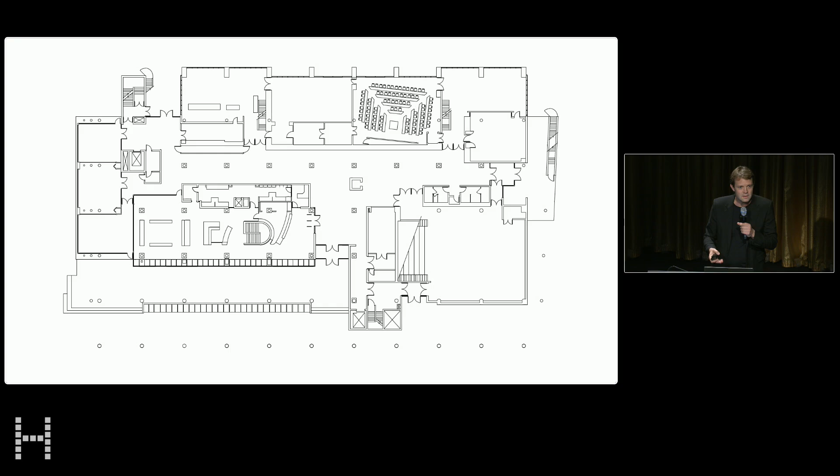And I thought, is this a building? Is this a climate? Is this a landscape? Is it maybe a landscape that mistakenly thinks it's a building? And so, as we always do, we started reading the existing situation. And we thought maybe those columns are part of a kind of hidden forest that holds the building. And maybe the walls are contour lines. Maybe someday a river was passing through. And maybe the perpendicular walls are obstacles that allow the building to have doors.

And so we were looking at this space, this hall, and how do you make an exhibition in a hall? It's quite an interesting question. And we noticed that there was a kind of a meander of that river, and so a kind of a center. And from that reading, we thought maybe we can use that center to place our 3 large-scale models that you have seen when you walked in, find a space to project photographs that our photographer Michiel De Cleene has been taking for the last 10 years, use the other walls for the necessary information, and then make a connection from these projects to the research by this 70 feet long wall where we project the surface temperature, and then again using the columns to frame the student work on Paris and on New York.

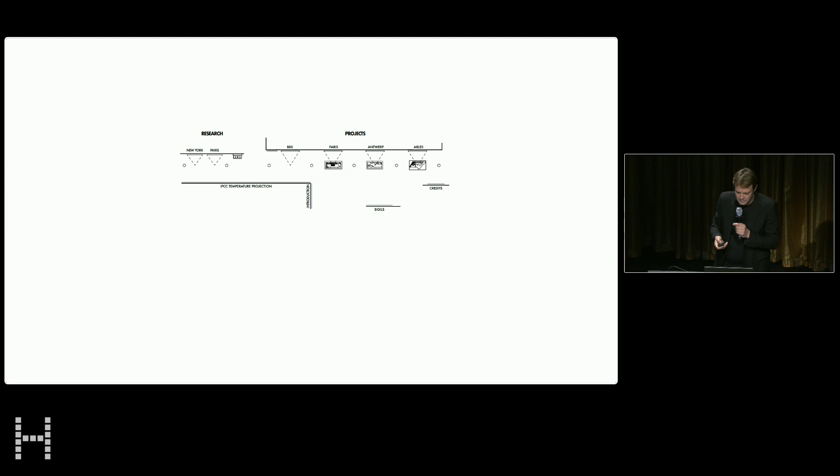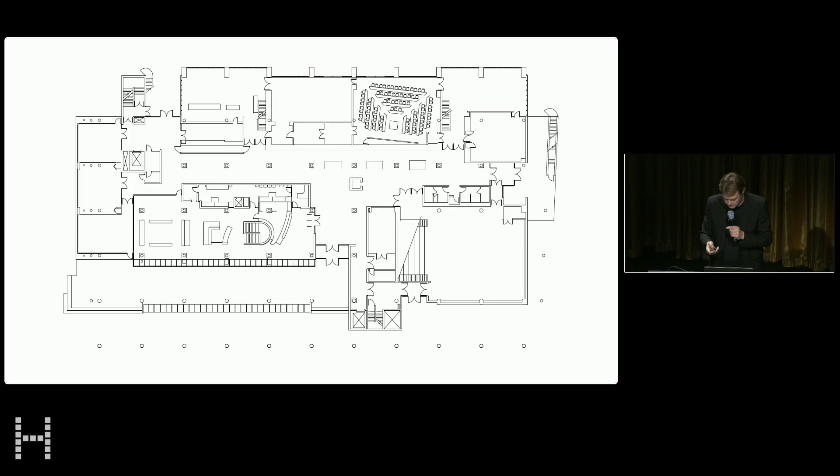And so in a sense, the whole build-up of the exhibition for us was yet another landscape, yet another climate that we wanted to insert in its context, in this case, a context of a building. This to show you how, for us, everything is landscape. And it was Maja Hoffmann that once told me, "Pour toi, tout est paysage." And so I'd like to walk you through both the research and the projects that we show here, and to show you how indeed everything is landscape.

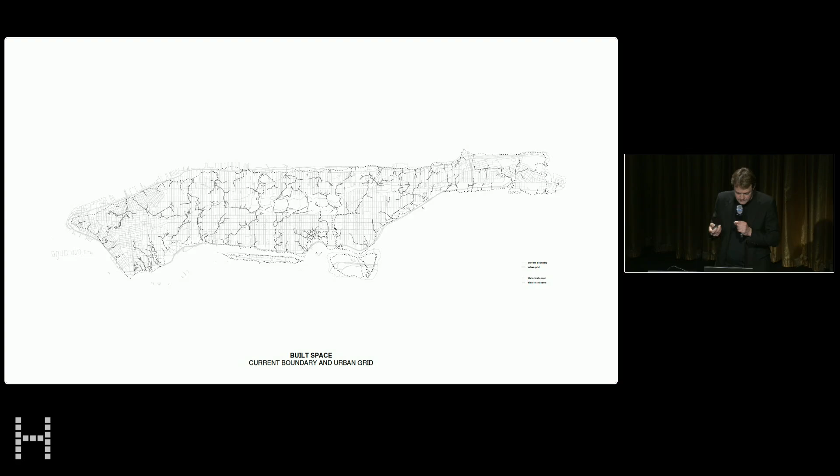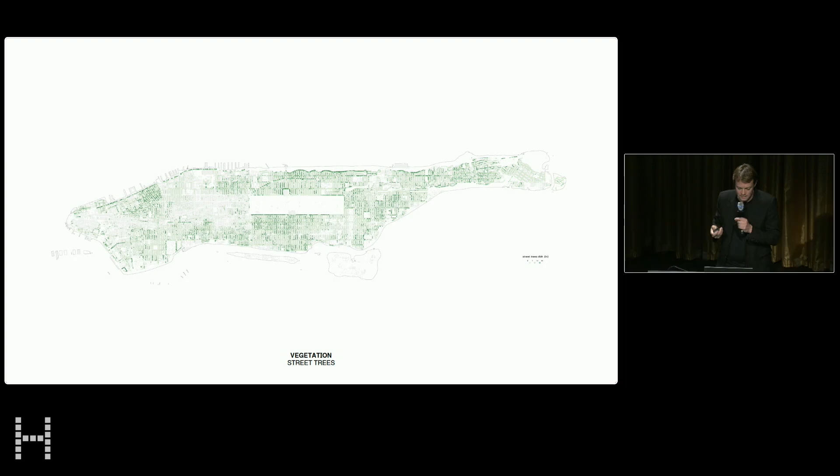The first case study we did was on New York City, and more precisely on Manhattan. And I had asked the students to work as a group, as a real studio, and to do a reading of the existing situation, going through the former tributaries, looking at flood risks today, at stormwater flood to understand that those are directly linked to the tributaries, looking at green space, but also at street trees, and even at possible rooftops. And so really mapping and mapping and mapping at the scale of the city, at the urban scale, to come up with a new type of cartography.

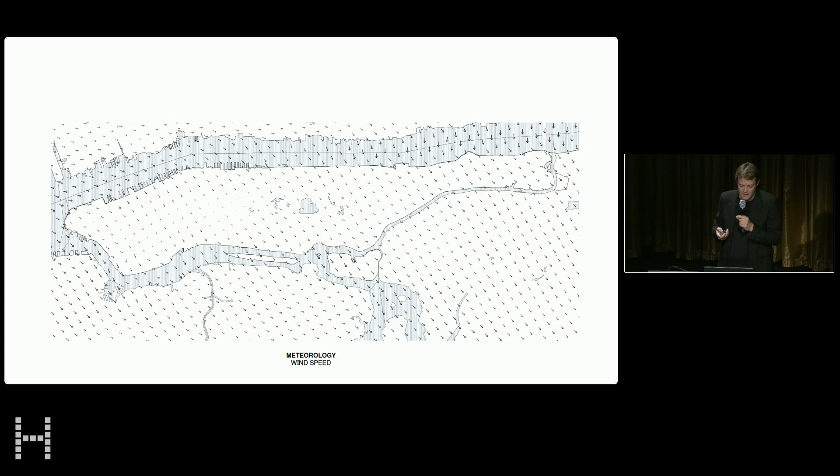And in the Dan Kiley lecture I gave last year, I showed you the von Humboldt design. So we're looking for a new way of showing and revealing this information that we extract from those readings. And those readings are physical, but also meteorological. So also the wind, also the surface temperature, also the quality of the air. And so this led us to these beautiful drawings that show everything except for the building. We make abstraction of the building to show how the built reality produces a multitude of microclimates. And for each of these microclimates, we can look at a similar situation in nature to learn from that situation and bring the logics of nature into the artificial second nature.

And that's what we did with the students who chose their own site. And for me, it's important that the students choose a site based on the problems they reveal. And I'll show you 3 of those projects among the 12 beautiful projects that had been made as an illustration of how I try to think with the students in a different way.

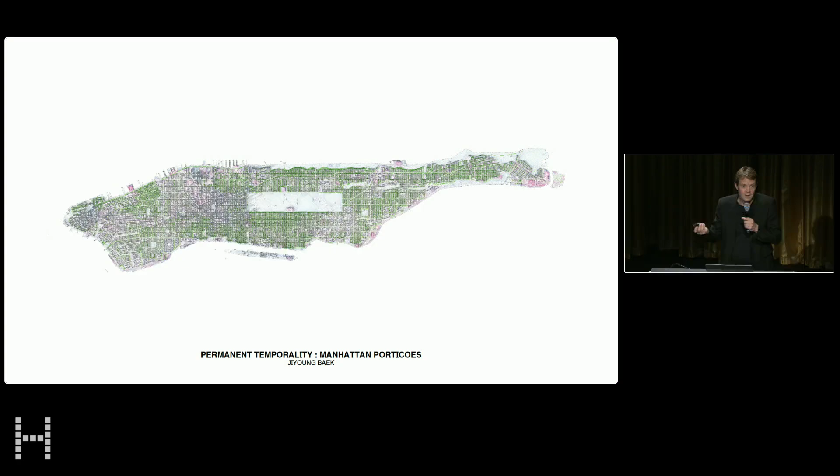So, for example, here, Jiyoung Baek looked at porticos, well, actually scaffolding, and she noticed that the temporary scaffolding of New York today is 1/3 of Central Park. Why is that? Well, she discovered that today it's cheaper to pay the penalties to keep the scaffolding in place because you need to verify the quality of your facade every 10 years. It's cheaper to pay the penalty than to dismount and remount.

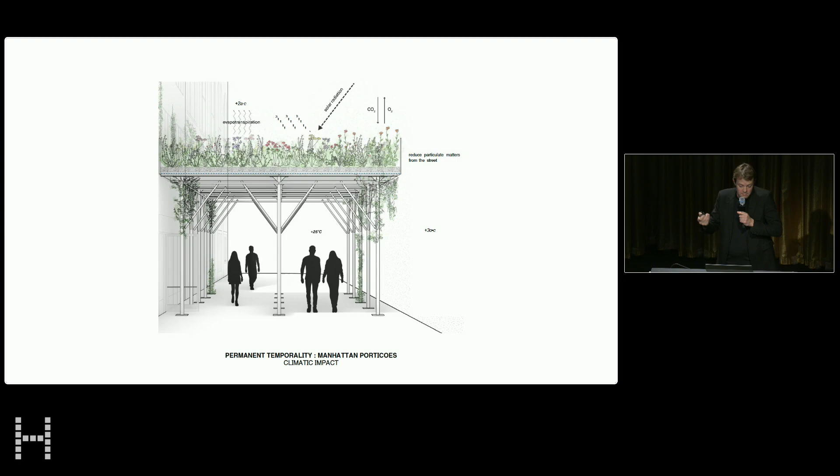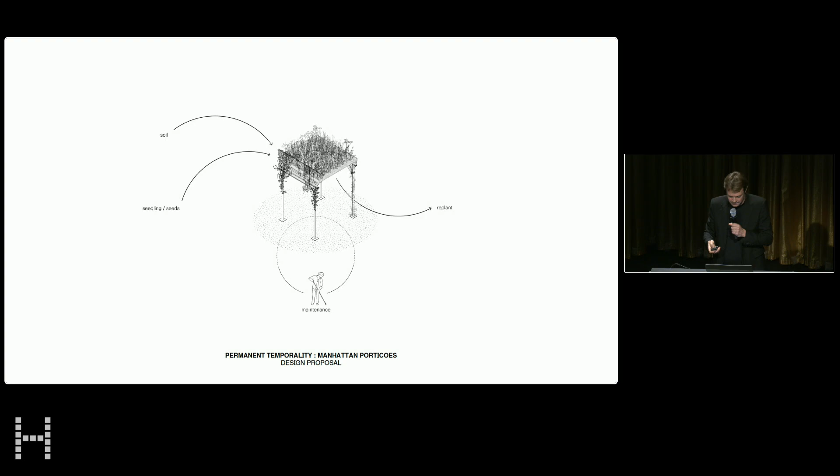And so she thought, and I thought it was a beautiful idea, to give a tax reduction or a penalty reduction if the scaffolding becomes a green roof, of course, creating a better outdoor comfort and bringing more biodiversity into the city. 1/3 of Central Park for free. And so I really encourage them to hack into the system and find ways of greening the city without cost. And so she did that in a beautiful way.

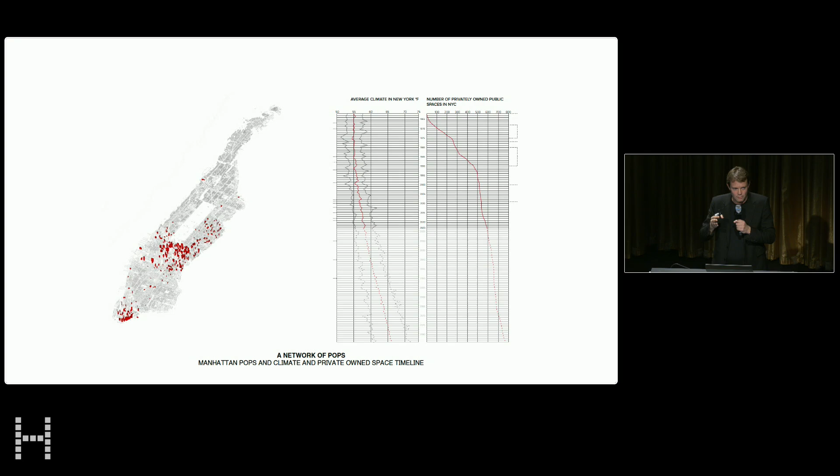And in that law, and I think it's 76, if I remember well, it was written you had to plant 4 trees. And so Austin said 4, why 4? So he thought, and thanks to Transsolar, with who we've been working on all these studios, he thought, let's measure UTCI instead of number of trees. UTCI is the Universal Thermal Climate Index.

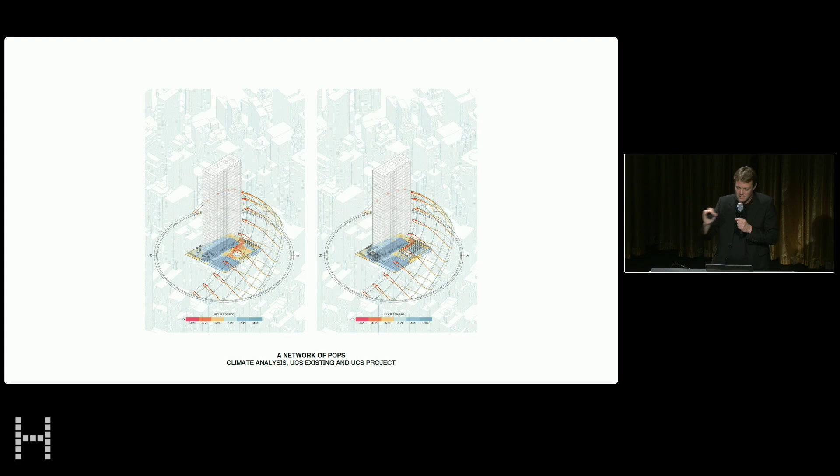So he thought by simply adding to that law that the UTCI should be lowered by X degrees, you could suddenly create a network of POPs. And here he showed that for a part in Midtown, and all the blue trees are the new trees that would be the result of this law. So again, hacking into the system to produce better public space.

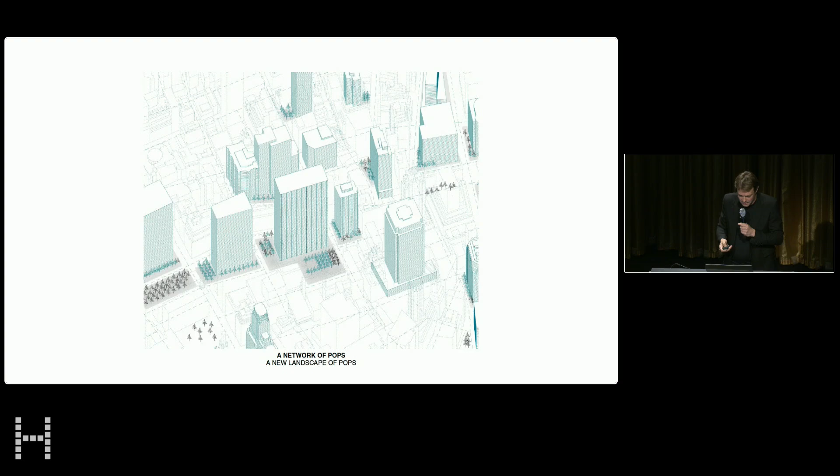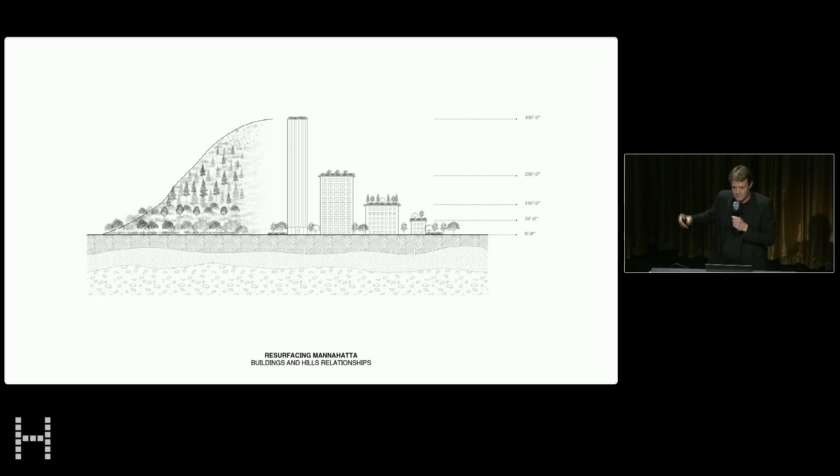And the third project by Parama Suteja was, he called it resurfacing Mannahatta, and he found out that Manhattan comes from Mannahatta, which means island of many hills. And so he looked at building heights, and he thought, well, actually, we still have the hills. I mean, Manhattan has been flattened. We still have the hills, but they are on buildings. And so he thought, can we make a new hybrid landscape of green roofs, and based on typology and weight, creating this kind of new green mountains on the hill of Manhattan.

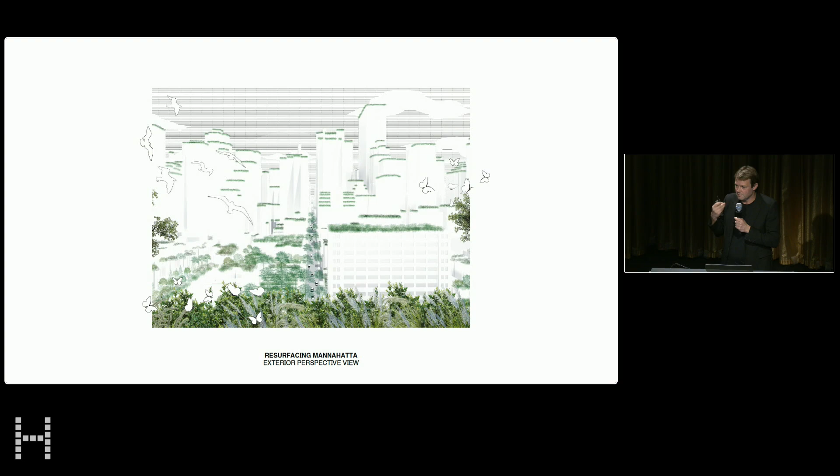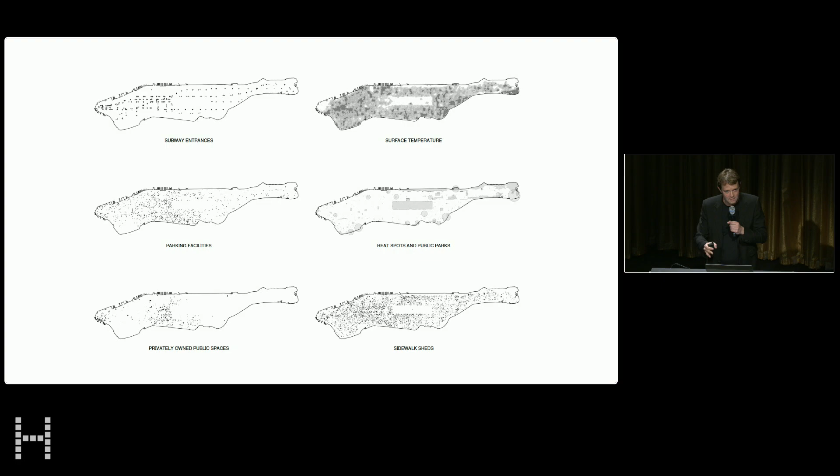So 3 examples of how, through the reading, through a new way of looking at the built space, a new way of looking at reality as a possibility for nature, for a new type of nature, how these students perfectly hacked into the system. And along the way, we make beautiful drawings, not because they're beautiful, but they're beautiful because of their clarity. I believe in clarity of a drawing. A clear drawing is always beautiful.

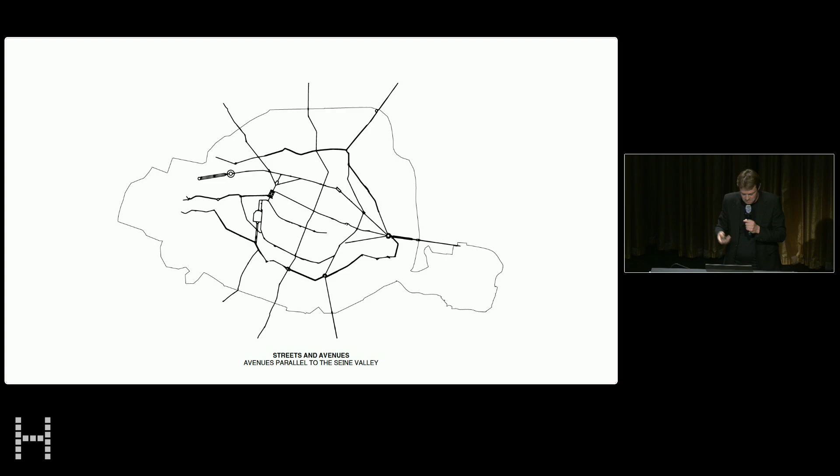The next case study we did in Paris. I'll run you through it. So again, the reading, the topography, we discovered that Haussmann's boulevards are mainly parallel to the contour lines of the valley of the Seine, except for a couple that are perpendicular. We discovered that the runoff from Montmartre, which you see on the top here, that creates flooding along the Seine, that water could be perfectly recuperated by these parallel avenues. And so suddenly you have a system to reduce flood risk at the scale of the territory.

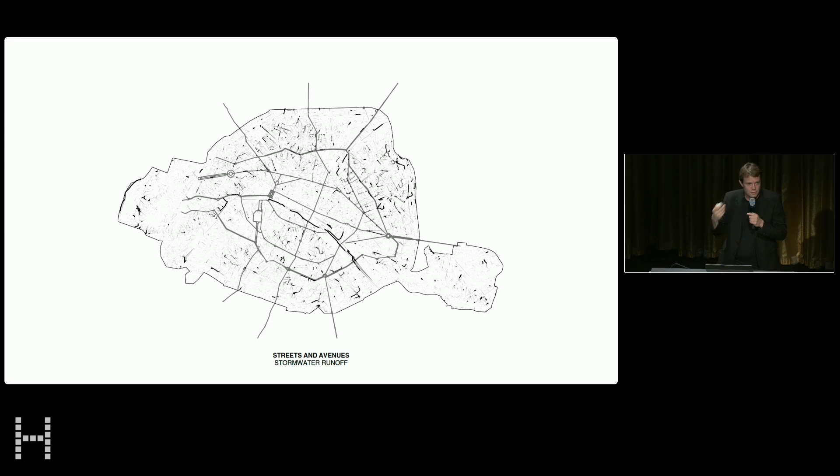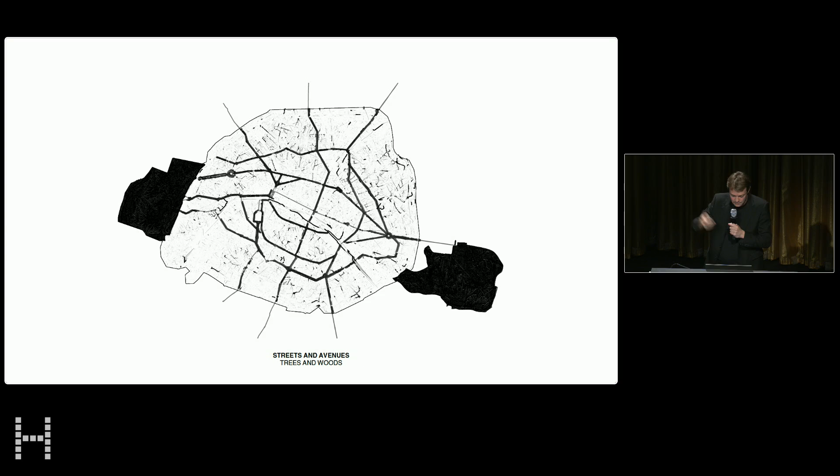We showed it to the city representatives that hadn't seen that at that scale. And so suddenly you could have these boulevards that are cooled down by the runoff, by the evapotranspiration of the trees that would create corridors from the Bois de Boulogne to the Bois de Vincennes. We looked at all the open spaces, cemeteries, squares, plaza, everything not built. We looked at parking lots. We looked at all the public buildings that also could become part of a way to battle heat.

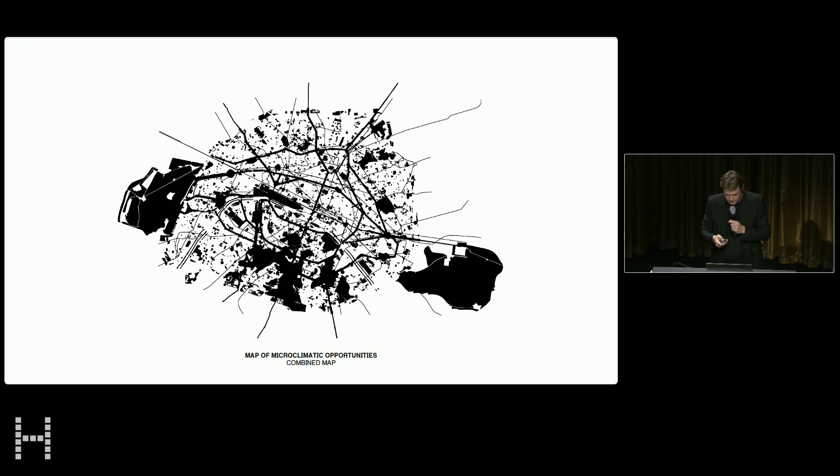We looked at the underground, from the car parks to the metro lines to the quarries, and then we made this map, which I really like, the map of possibilities. This is the map of all the combined elements that we think we can hack into, and I'll show you what the students did with a couple of examples. Again, they chose their own sites, but here, since Paris is made up by typologies, we looked at changing those typologies, and we looked at a way of organizing the kind of dramatic future that lies in front of us, and you can see it on the wall.

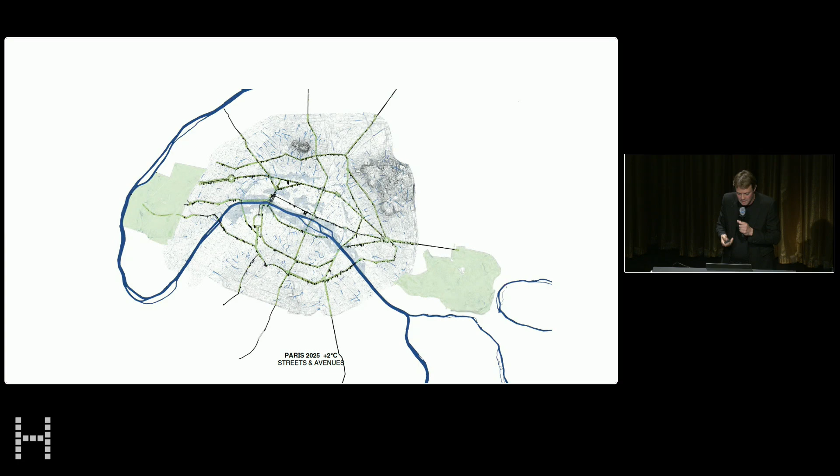We looked at what to do at 2 degrees more, 2025, what to do at 3 degrees more, 2050, what to do at 4 degrees more, 2075, and what to do at 5 degrees more, 2100. And so in a very pragmatic way, we come up with the proposals. Here, for example, 2 degrees more, I mean, we're at 1.3 right now. We should use those boulevards made by Haussmann, and this first group showed it.

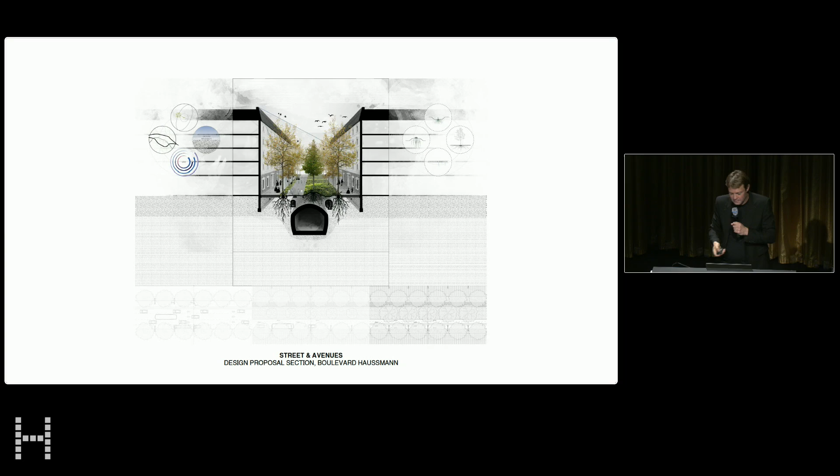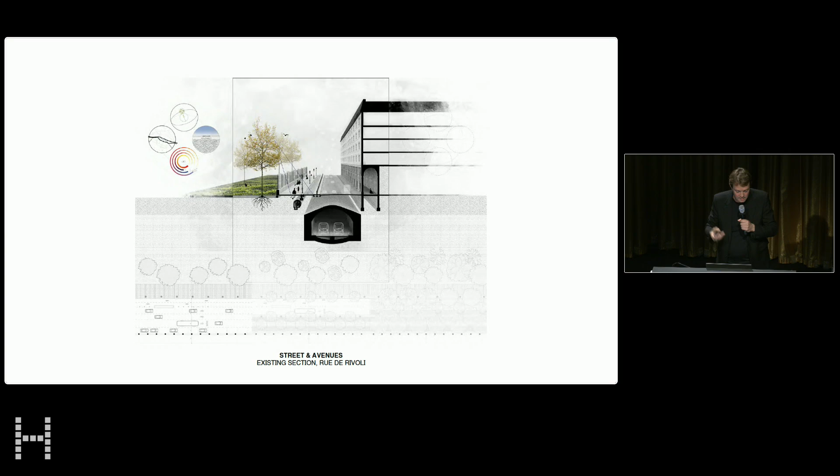By taking out space for traffic, we can make bioswales. We can store all that rainwater running off from the hill of Montmartre, using it to feed those trees to create evapotranspiration and making a microclimate. The city was very positive towards that, because that's exactly what Hidalgo has been doing, reducing space for cars and creating more space for pedestrians, bicycles, but also vegetation. So 2 examples of that.

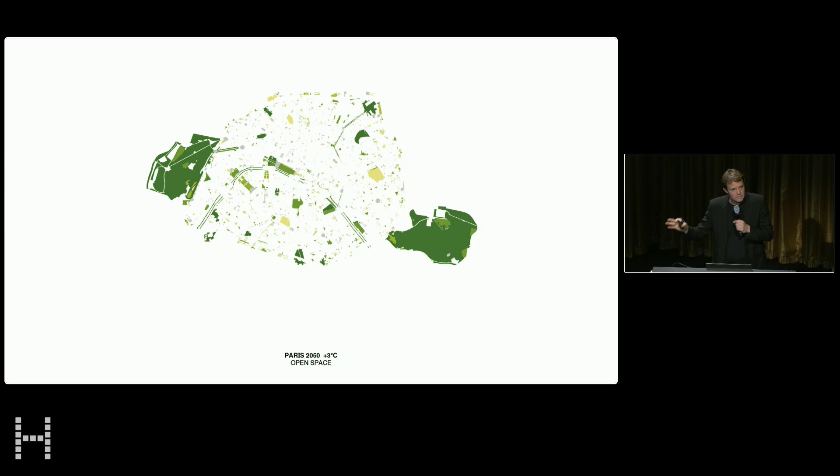If we go to 3 degrees, the group working on 3 degrees thought about what to do with open spaces, both gardens, roundabouts, or plazas. And for example, Roxanne Garner looked at l'Esplanade des Invalides, one of those sacred spaces for the French. And she found out that the lawns are not possible anymore.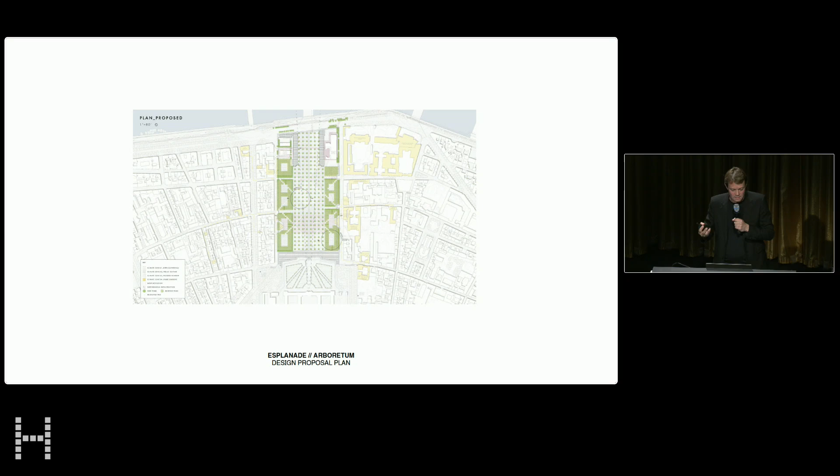When it's too hot, you're not allowed to water them, and so they die out. So she thought, why not use the grid of the trees that border those lawns, create an arboretum with trees that are climatically resistant to the drought, and to suddenly frame Les Invalides, this famous view, within a park-like structure that can be used instead of a lawn that cannot be maintained.

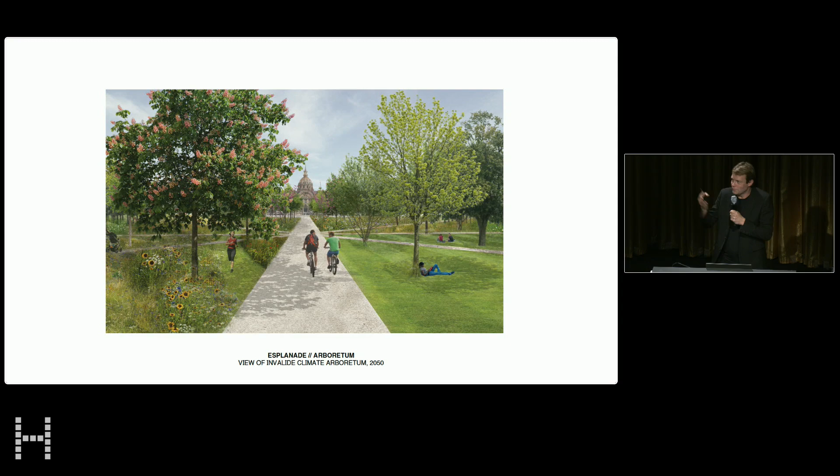We had an interview with Le Parisien, and this became the cover of the journal. And so, in a very interesting way, with the students, we're allowed to try these things out. Like, I could not do this while working on Notre Dame, but because it's student work, we can really test new ideas.

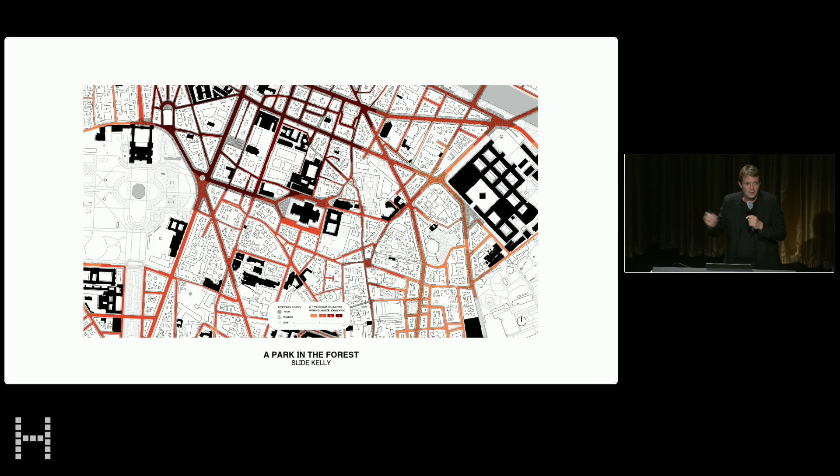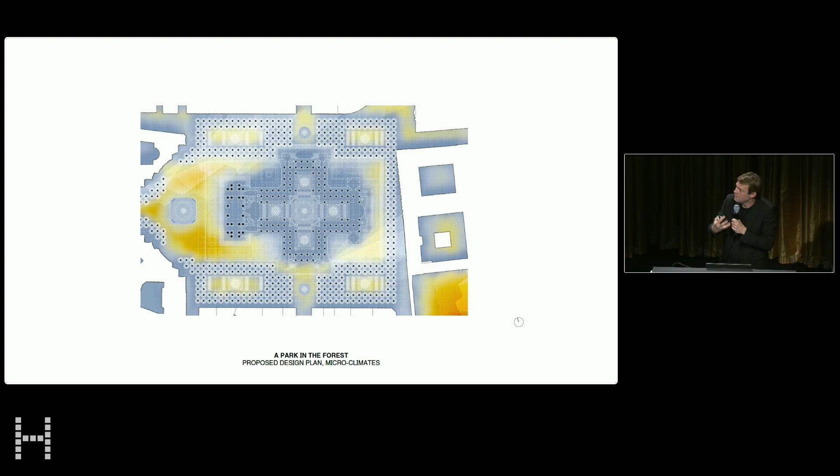Then we go to 4 degrees, and it's also based on what the city of Paris is already thinking of doing, opening up schools to deliver water to neighborhoods that have problems with the heat islands. And so here, 3 students looked at different types of public buildings. And I will show you the work of Slide Kelly for the Pantheon, another of those sacred monuments, surrounded by hardscape, surrounded by facades, so really heating up in summer. And he looked at the plan of the Pantheon as if it was indeed a forest in stone, and continued that with a forest of trees surrounding the beautiful footprint of the Pantheon.

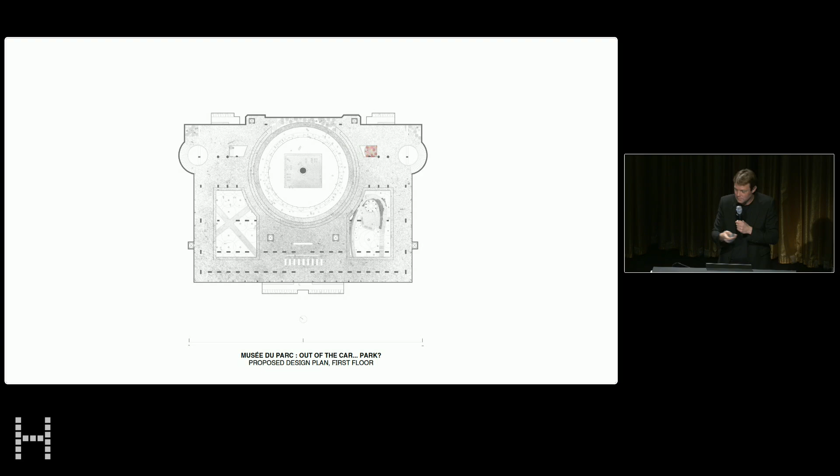And then at 5 degrees, the group really took it very seriously and thought, okay, if it's 5 degrees, I mean, we're looking at 50 degrees Celsius in the summer, we need to go create refuge underground, a bit what Houston is already doing today. And Crane Saris looked at parking lots, and he thought, actually, parking lots are a great structure, because, of course, you create shade. And he looked at another one of those great places, Place Vendôme.

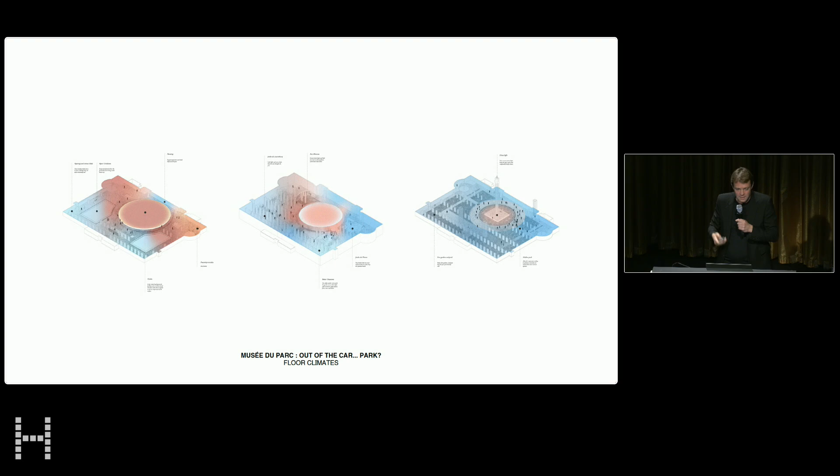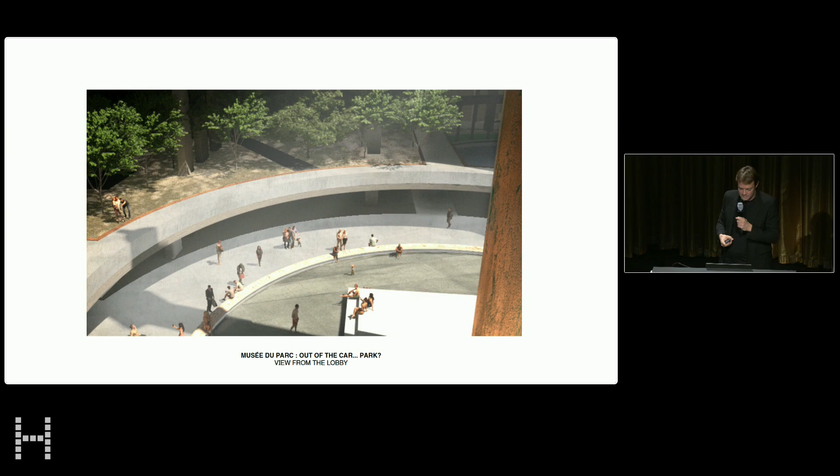And he thought, if I make a big opening around the obelisk, if I take out a couple of floors, I can bring back the idea of flâner, of walking around on the boulevards in Paris and in the parks of Paris, but in a better temperature, in a more shaded place than in the scorching sun outside. And so here he made these beautiful images of the Place Vendôme become this kind of temporary and contemporary grotto.

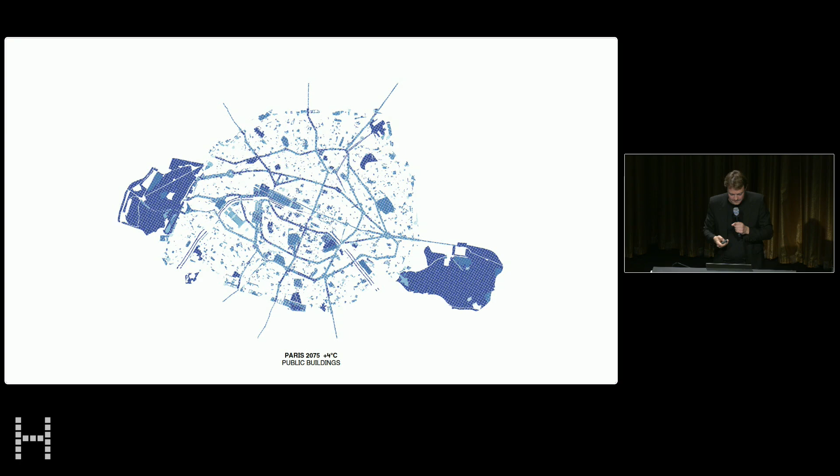And here we looked at the possibilities of 2 degrees with the streets and the avenues, 3 degrees the open spaces, 4 degrees the public buildings, and 5 degrees the underground, to again make a kind of blue map of possible interventions to make the city ready for the challenges of climate change. That research is projected on a white wall right next to the black wall where we show our projects.

And just to give you an idea of what we have been doing these last 15 years, I asked Michiel de Kleene, who has been following our works for the last 10 years, and the idea is that he doesn't take the right picture at the opening, as you would maybe do for a building, but he goes back to the site. So he takes pictures every time he's there, in summer, in winter. And so he made a selection of 106 pictures of 50 projects organized by month. So you go from January to February, from winter to spring, to summer, and to autumn. And so these play in a loop as a kind of showing the possibilities of change.

Next to that, we show 3 large-scale models. I'll walk you through them because we don't try to explain the whole project, but we try to explain the climatic approach. And so each of these 3 projects responds to a different challenge of climate change. In Notre Dame, specifically the heat islands, you may remember from the past, if you would wait for 3 hours to go into the cathedral, you'd have a headache. Well, they expect 15 million visitors after the opening, end of this year. And of course, the climate is not getting any colder.

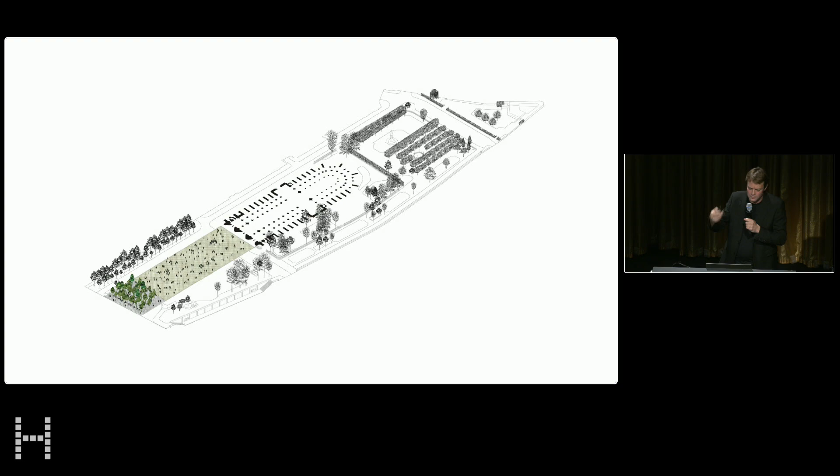And so here, from a precise reading of the site, even redrawing the trees at the same height, at the same width that they have, we proposed a scheme where every one of those typologies, from the parvis to the placette, to the square, the gardens, to the street with its alignments, and the embankment along the Seine, we rethink each of these very strong typologies in a climatic way. So we try to bring the past with us and make it ready for the future.

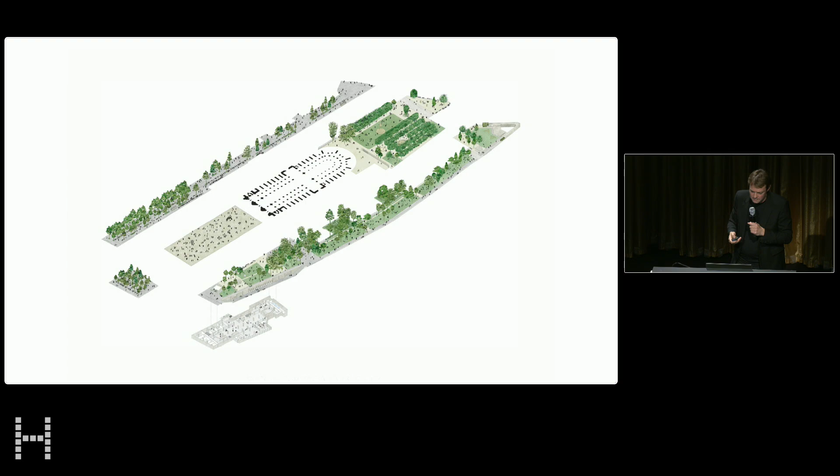And this idea of working in these typologies allowed us to have each of these elements progress within the theme of climate, if you understand what I mean. So we could think, okay, we can plant some more trees on the north side of a cathedral because that's in the continuity of the trees that are there.

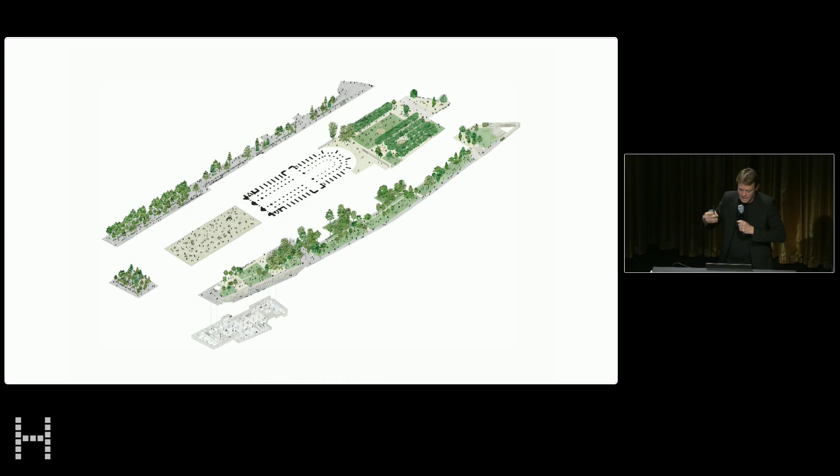We can rethink the plaza as a continuation of the inside of the cathedral. We can think the embankment as a continuation of the trees along the Seine. So suddenly we would concentrate on the typology and make it part of a whole. I'll show you a couple of pictures.

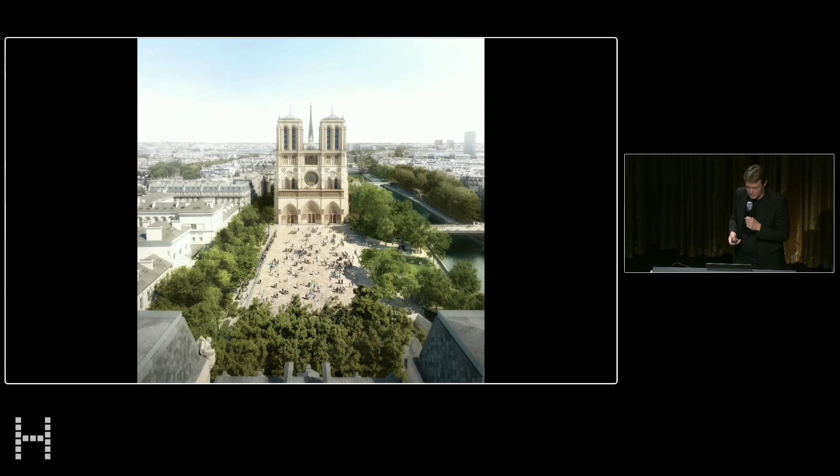So the parvis becomes a clearing. It's not just a plaza, it's a clearing surrounded by trees that provide shade. And so these 15 million people, before going inside, can profit from this shade and the evapotranspiration of the trees.

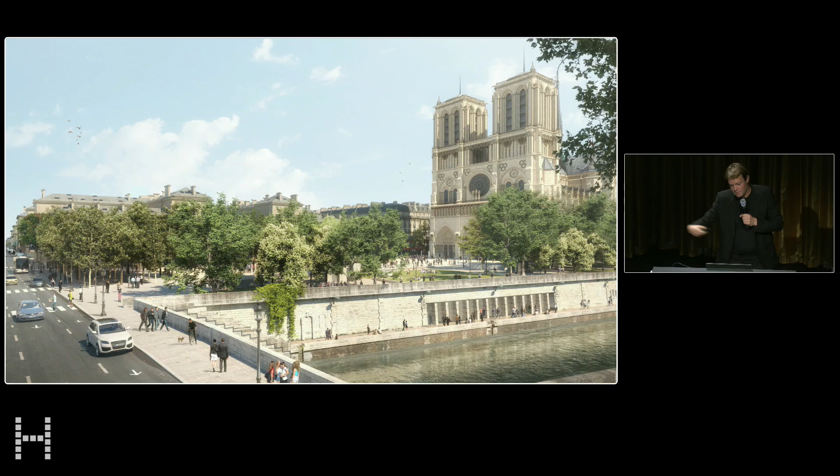Along the Seine, we planted 150 more trees to create shade again, to also help cool down the wind that comes from the Seine and that goes all the way to the plaza, but also at the tip where you have this beautiful memorial by Pingusson. We take out the parking places that were there. We plant new trees. We make the lawns bigger, and we invite people to really do the walk around the cathedral, not only be in front,

but walk around. And then on the plaza itself, and that's shown on the model as well, we invented this idea of adding a thin layer of water, and my daughter here will show you, that will run down to the cathedral and will create evaporative cooling. So it will not cool down the stones, but it will cool down the air through evaporation, about 5 to 10 degrees, depending on the wind.

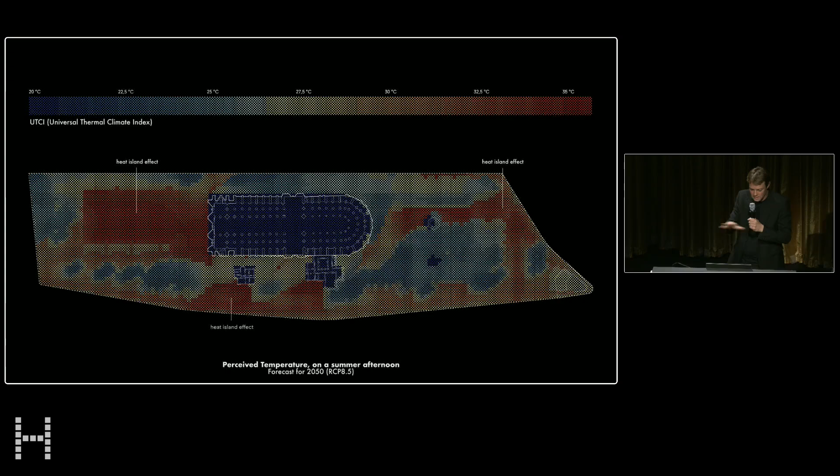And so on the model, what we've tried to do is to show how the UTCI, the perceived temperature today, will become worse around 2050. As you see, it's becoming dark red, so you create all these heat islands, especially in front of the cathedral, where we're obliged to keep an open space, but also in the back. And here you see that through the trees, through the water layer, through the wind from the Seine that passes through, we can work on the perceived temperature.

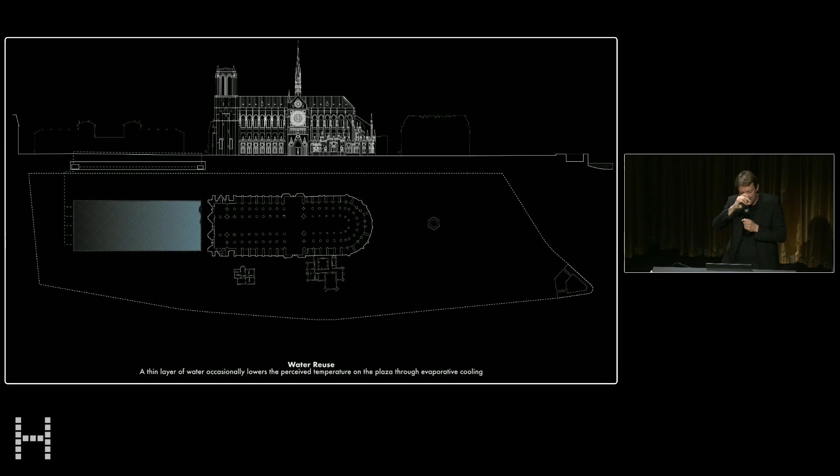More about this water layer, the idea is to store the rainwater in the former parking lot that will become a visitor center, and on hot days, we can pump the water and create that layer, 5 millimeters really, to create that evaporative cooling.

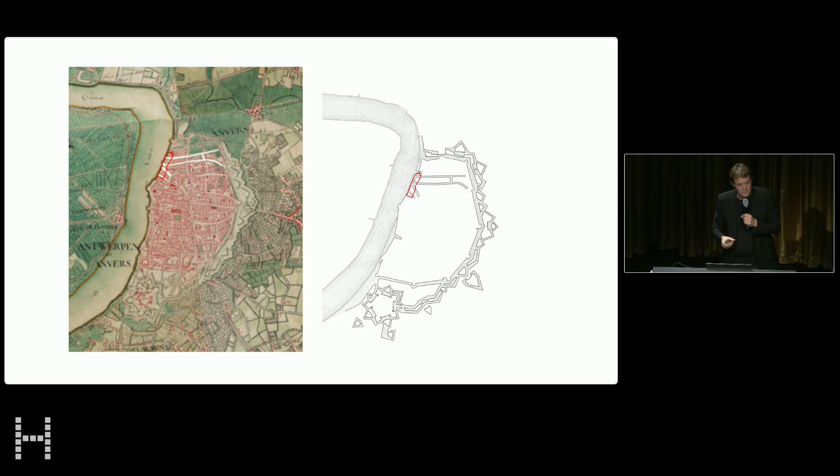In Antwerp, we were faced with a different climatic challenge, that of sea level rise. Antwerp, which was really the center of international commerce in the 16th century, was developed along the Scheldt. And in white, you see an ambitious project to make inland harbors. These were made, and the idea was to build many more all the way down south. But then came the Spanish invasion. All the engineers fled to the north and built Amsterdam.

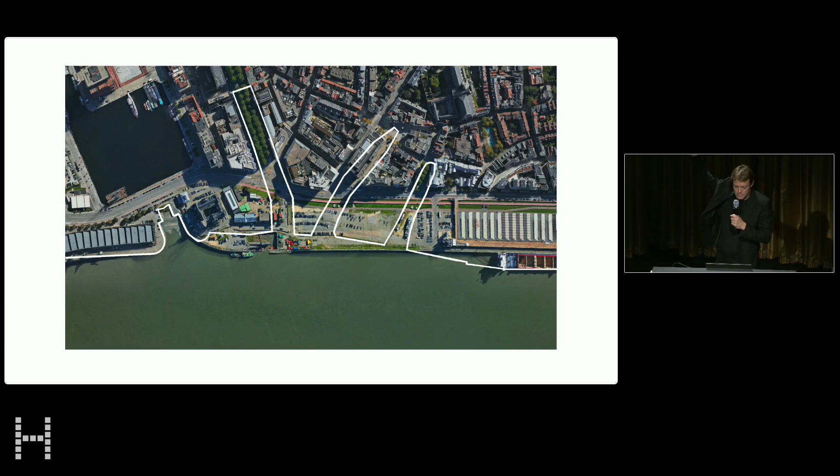But what's interesting is that, and I didn't notice before doing the competition, in the city fabric you still see the width of these canals. They have become what we call vlieten. And so I thought, if we have to make a new wall that cuts the city from the river, because the wall is 2.2 meters high, so 7 feet high, can we not keep a relationship between the city and the river where these inland harbors that you see here below used to be?

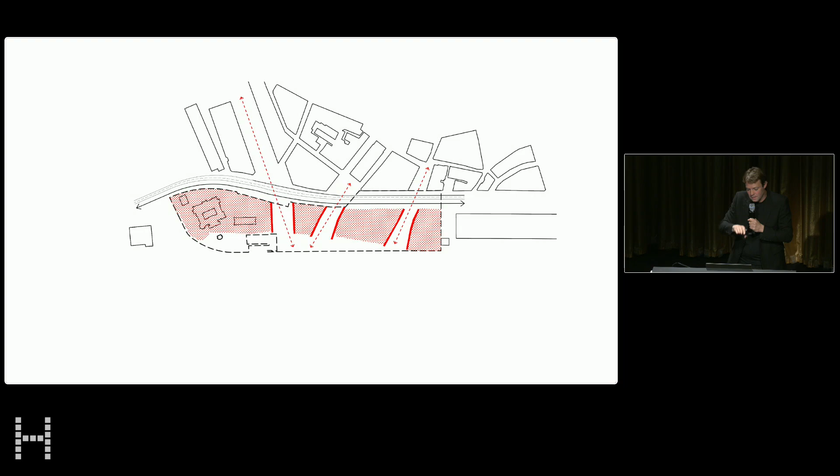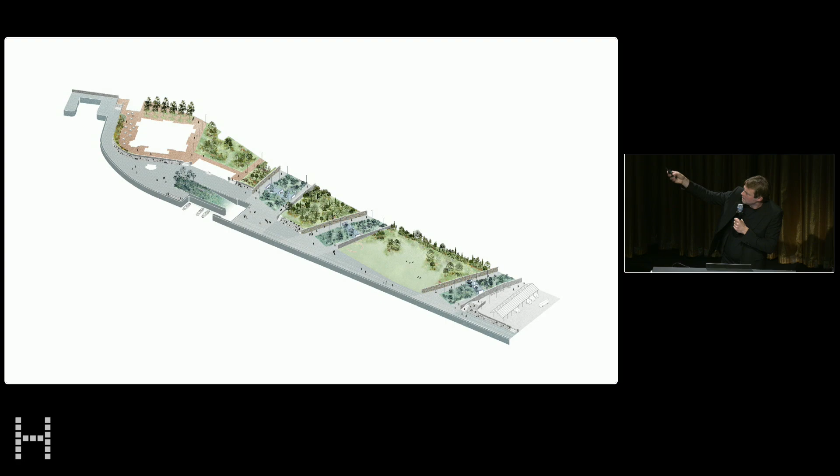And so we decided to make retaining walls along those former canals that allow you to create a landscape in between, and that landscape holds back the water, as you see here, instead of having a retaining wall along the embankment. And so here we made a sequence of these park structures, and then the mobile walls that can close off the connection with the city.

Together with the engineers in our group, we looked then at different ways of making retaining walls, using the earth as a wall, using the mobile doors, using the steps, a whole typology of walls to avoid, again, a 400-meter long wall cutting the city from its river. Here you see how these walls create the connection with the city. Also came the question to make a memorial for the 25,000 people that died in World War II, and we use the history of the city to commemorate its victims.

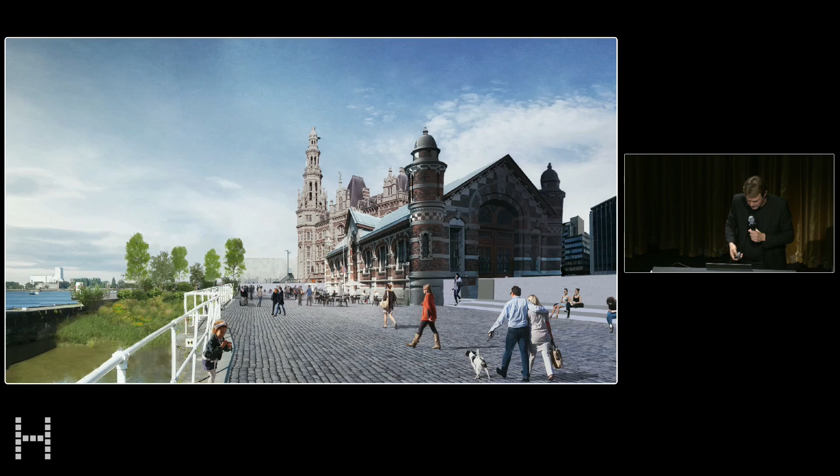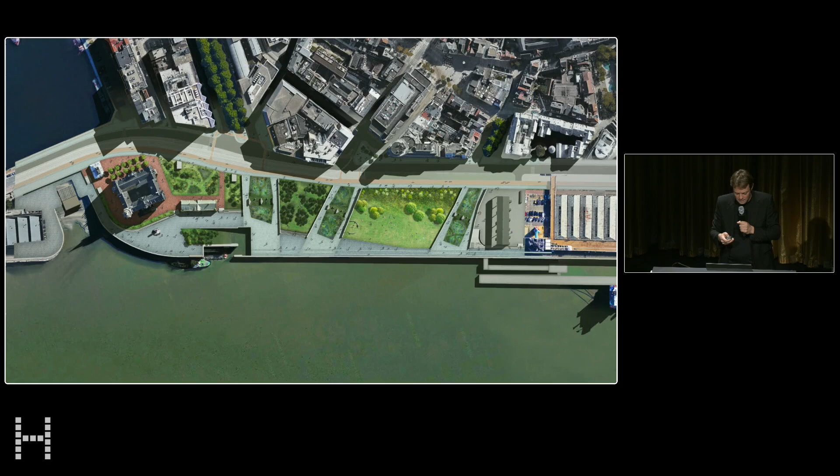Because we have this lawn that builds up 7 feet high, you have a beautiful view on the left bank. And so from the existing situation you see here, we come to this proposal. And here too on the model, we try to show the different levels of the water. I'll show that here.

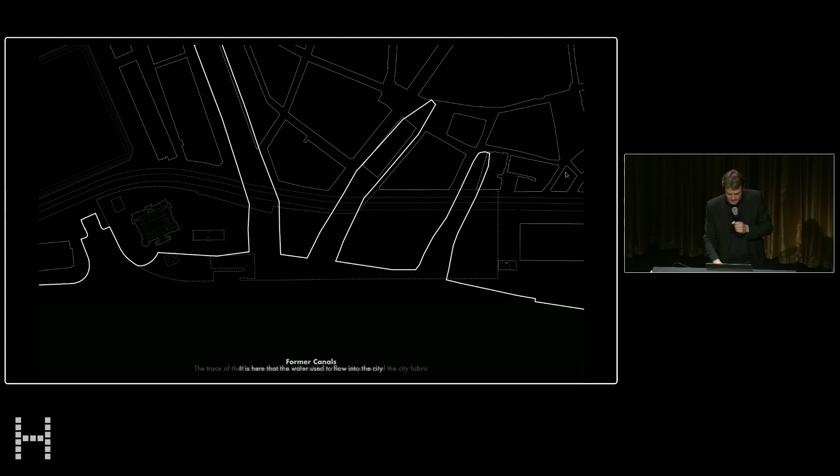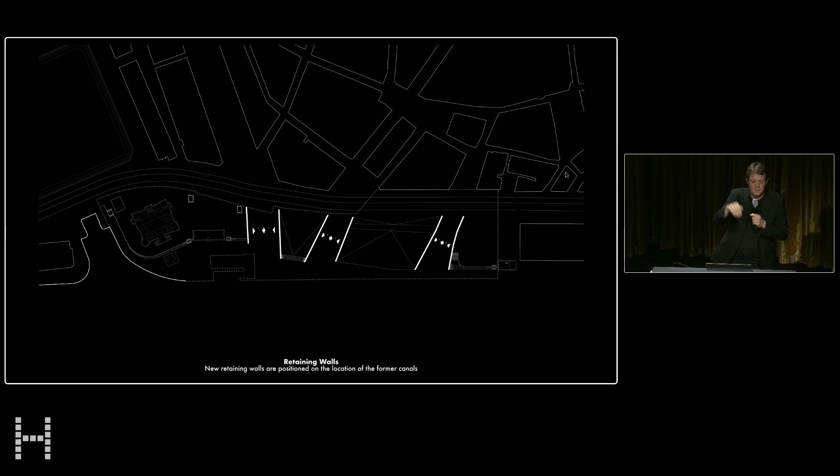So you see the former canals that correspond with the width of the streets existing today. The water that used to flow into the city. There was another element: there's a lot of archaeology on this site dating back to the 15th century. The only place we could dig out was where the former canals were, because everything was dug out there. So anywhere else we go higher up, so we're not digging anything. So that also worked beautifully together.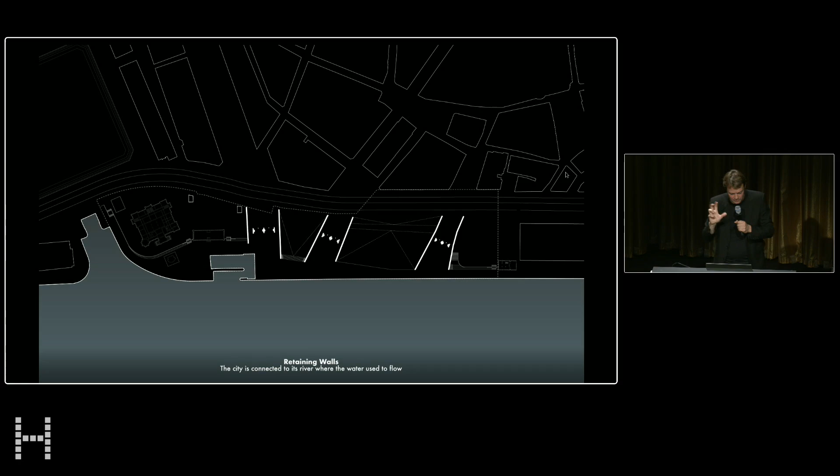Then here you see the water in a normal situation. Our new seawall made up of these retaining walls, this earth, and here you see the mobile walls closing down. And so when the storm hits, you get this hybrid retention wall along the Scheldt.

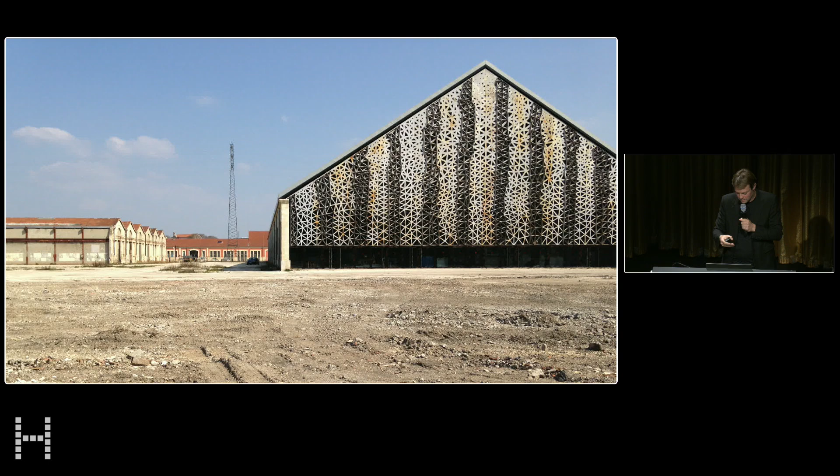And from this, I come to the third project dealing with climate change. Arles, France, where the Luma Foundation built its headquarters and its center for the production and the exhibition of art, and where Maja Hoffmann asked me to transform this sterile wasteland into a park. And here too, this is 10 years ago, the first question that came to my mind was, I can only make a park if I change the climate.

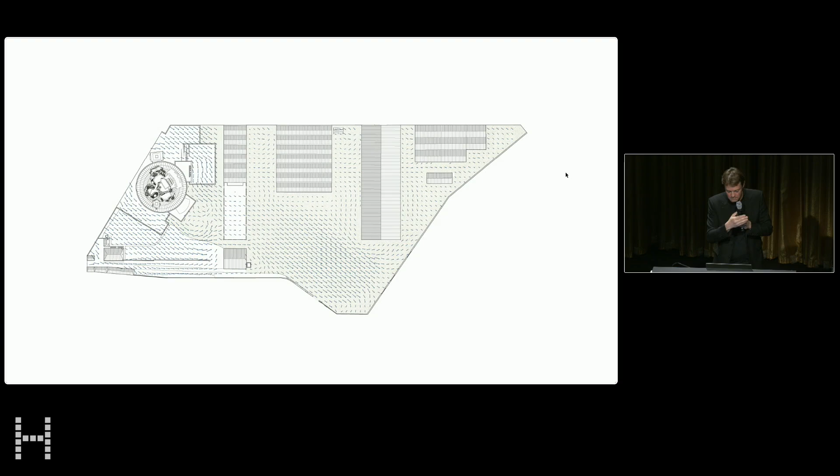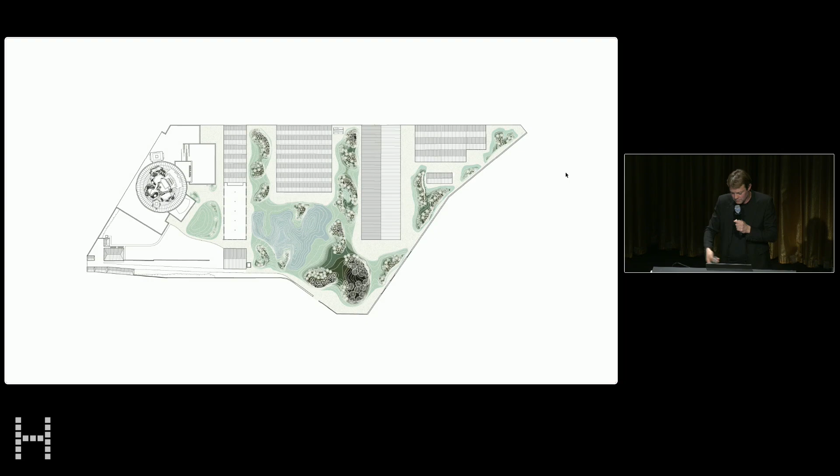And to change the climate, we did a lot of studies that I won't be showing you today, but the idea really was, what would nature do in 100, 200, 300 years' time, and how can we accelerate that process? How can we use the force of nature to have it come back to the city? And so we looked at wind, how wind would bring sediments, how sediments would create environments, and how trees and shrubs and ground covers would find root in those environments.

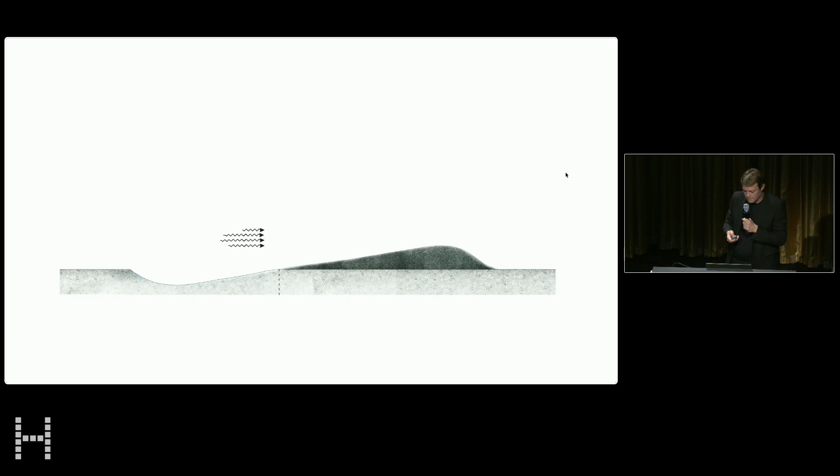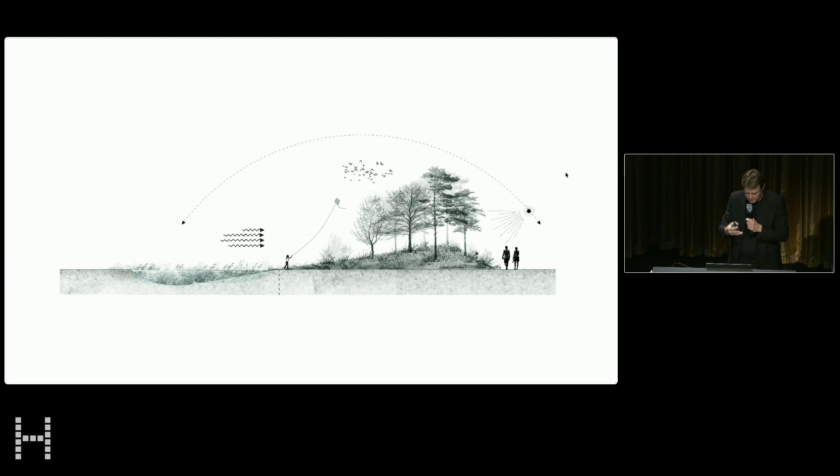The topography is modeled by the wind, and this produces an asymmetrical section where in the summer you can lie on the soft slope in the shade, benefiting from the breeze, while in the winter you can be in the sun, benefiting from the cold wind cut by the topography and the vegetation.

And so in function of the amount of earth that we added, we go into a next ecological succession. And I always say this, but when you walk in the park and you see the mound build up and you see a pine tree, you've not gone into the past, but you've gone faster into the future. You are 300 years later.

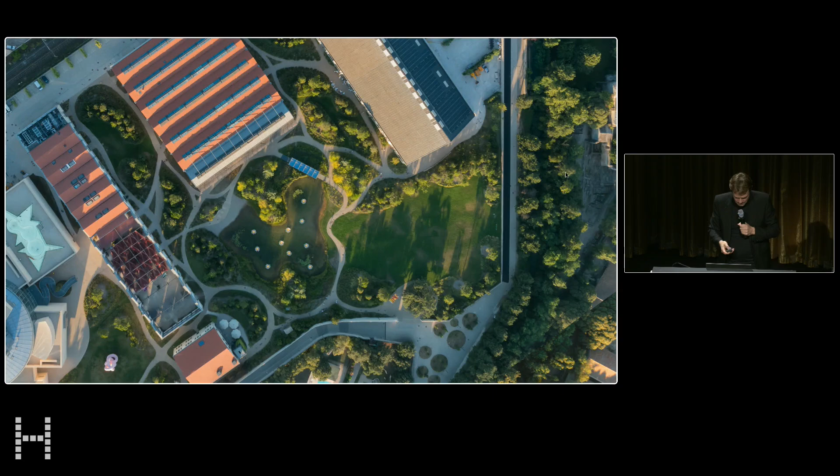Well, this is built, so I can show you a couple of pictures. So everything you see, we planted 80,000 trees and shrubs, one by one. And this I wanted to show on the model, because here the other models were made to win the competition. This model we made afterwards, and I asked the model makers to plant every tree exactly where it had been planted. We designed all the trees in AutoCAD.

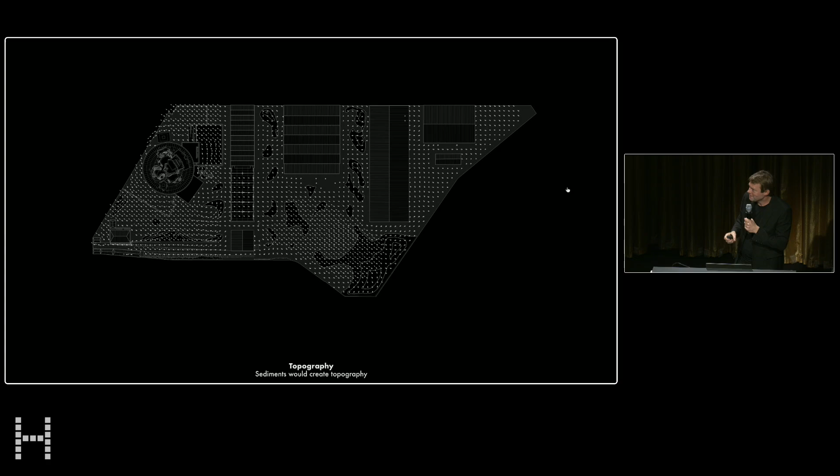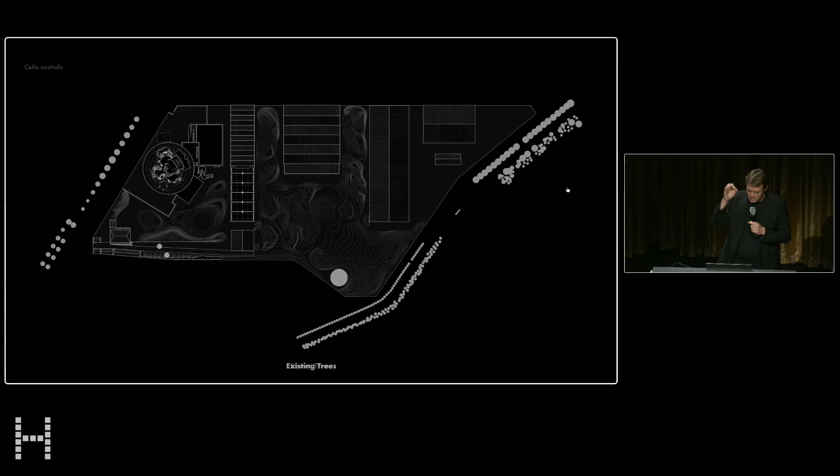They were printed in 3D, so a pine tree looks like a pine tree, an oak looks like an oak. It's totally crazy, but I think it's the most precise landscape model we've ever made. Here you see the topography being made, accelerated by the wind. And then, and you'll see it better on the model, we show you the plantation of all those trees and all those shrubs. And so you see the list on the left.

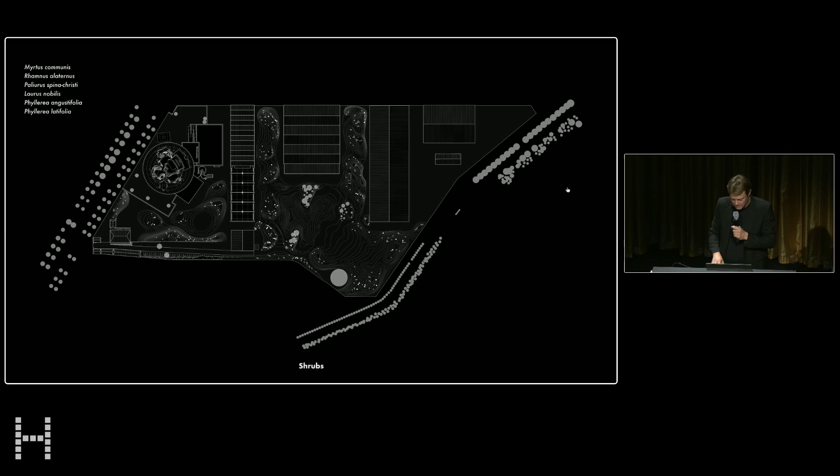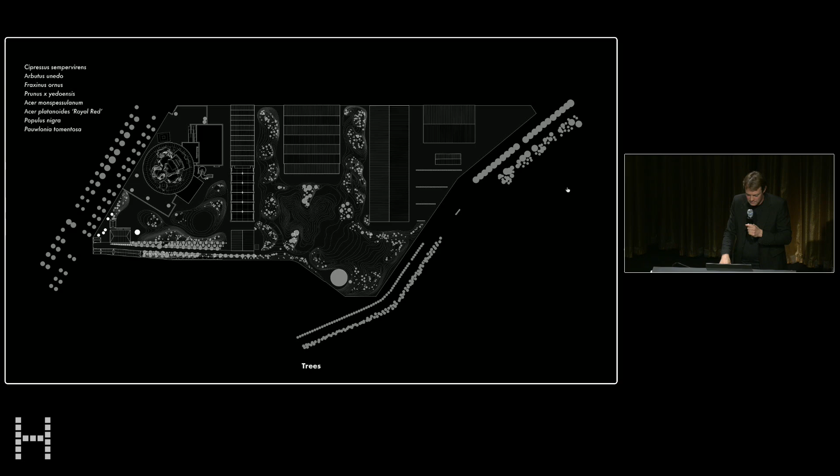But you see again on the model exactly what we built on site in Arles. And so these trees, and Transsolar is here. We worked with Transsolar on the UTCI, and we lowered the perceived temperature by 20 degrees in summer. 20 degrees because of the evapotranspiration, because of the evaporation of the lake, because of the changed radiation. And so I think this is the best example that, yes, we can make microclimates.

And the idea is, and it's a beautiful idea, is that if you reduce a desire to its minimum and its most concentrated form, and you keep that form in your head, it will become true. That's the magic theory. And so what we do here is, for each of the projects, we try to summarize, but it's never a scheme. It's always based on real physical reality. Like every form is a real form.

But it is the desire of a land to become a landscape. And it's a desire of a landscape to produce a climate. And so each of these projects that are on the wall, 84 of them, have been built or are under construction. So each of them corresponds to a project and to a territory, and are again the promise of a possibility to make microclimates.